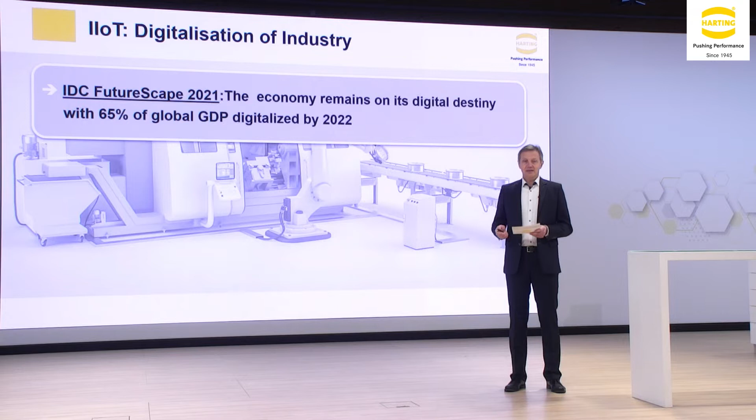You see here 2021 - it was my mistake, sorry, it is 2022. That means this year, we will get globally, worldwide, a GDP of approximately 65% done by digitalized products. At the same time, especially for production systems, a lot of OEMs or operators for production systems are a little bit confused with sentences like, from T-Systems, 'digitalization is disrupting existing business models and global markets became increasingly volatile.' What does it mean?

Is digitalization a risk? Or are the changes - what you, our customers, what we as HARTING can have in the future - are the chances higher than the potential in general?

I hope you agree with me, the German Association of the Industry is saying the Internet of Things and Services is now becoming an integral part of manufacturing. Industry 4.0 paves the way for the personalized product, new services, and a more flexible working environment. This is a global view, a top-down view.

If we look deeper into the situation, I was looking for one example where we can take a look at the problem that OEMs, machinery builders, end users, or operators are facing. What is the problem there?

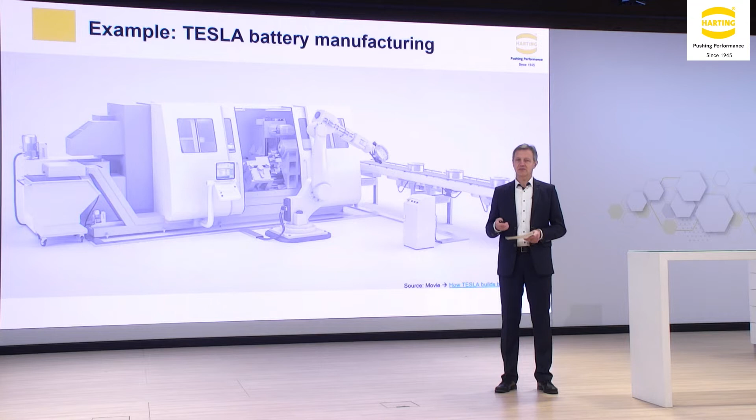It was really interesting that Mr. Elon Musk, everybody knows him as the CEO and owner of Tesla, explained the situation for battery manufacturing, especially in connection with the new contract with Panasonic. Elon Musk talked about the first battery manufacturing plant in the US.

First, we realized that the true problem, where the greatest potential lies, is building the machine that makes the machine. In other words, building the factory.

And remember, please remember, you can read it - they achieved approximately 10 times higher effectiveness with only 10 to 15% of the effort that was needed in the past for this manufacturing plant. You can imagine how big this step was for Tesla.

But at the end of the day, the same Mr. Elon Musk said, we did go too far on the automation front and automated, digitalized some pretty silly things. So how can we balance this? How can we find the balance?

This is the matter we are speaking about today, because we as HARTING are absolutely sure and can guarantee that we can find the right solution for you on the physical layer. First of all, HARTING is known for years, more than 70 years, as a manufacturer of connectorized solutions.

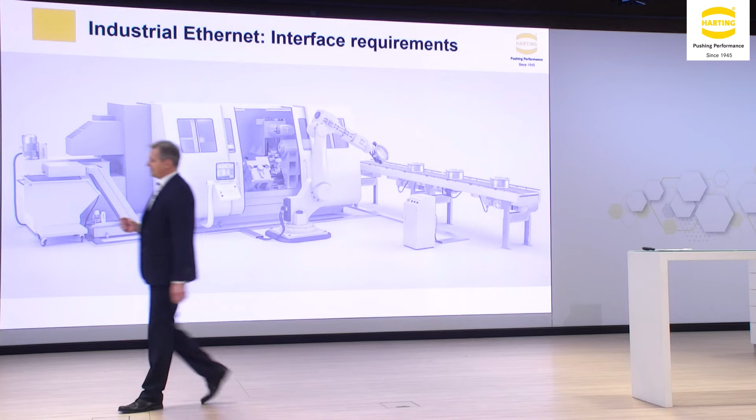The second reason - I would like to show you the machine, because we have our own machinery builder, HARTING Applied Technologies. This is a fully modularized machine. You can imagine we can manufacture assembling machines with up to 7 to 8 different modules, with upstream and downstream modules.

As you can imagine, our HARTING interfaces are used everywhere in these machines, because today we are speaking about Ethernet interfaces, especially data interfaces. We have an HMI where you see a special interface for service needs and similar issues.

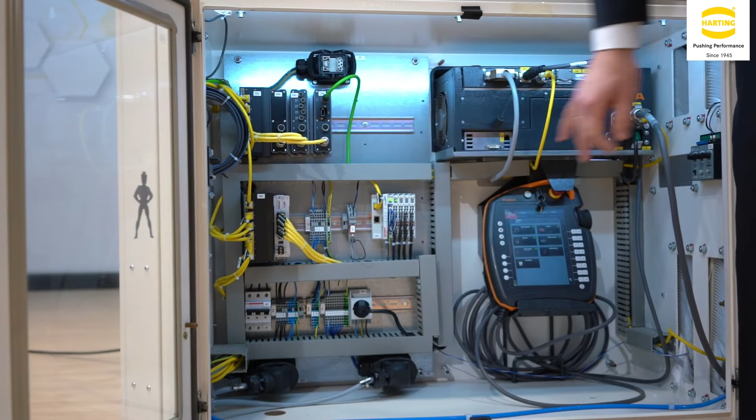Then we have some units, of course from different manufacturers, like a KUKA robot with data interfaces. If we take a look into the control cabinet, you see a lot of connections between KUKA control units, different units for control systems, our own HARTING Ethernet switches with ix - really, really small parts - Ethernet switches with RJ45, and so on.

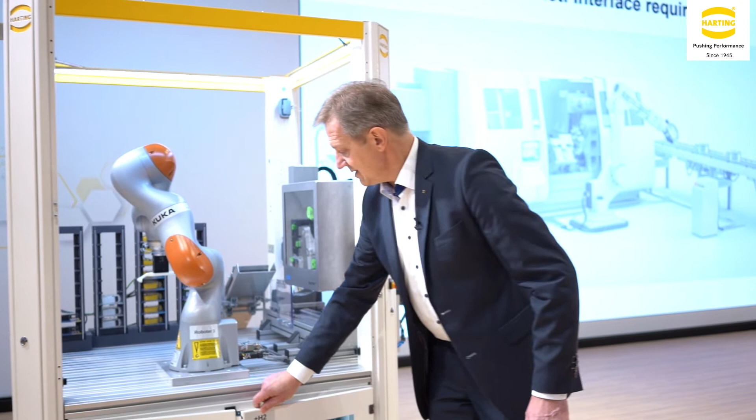Everything you see here on the physical layer are HARTING products. If you go further, you will see later how important it is that we have all different types of connectors, but we also allow you to migrate your network systems in the way that is comfortable for you.

For example, a printing unit connected by Ethernet in IP20, or sensor boxes in IP65.

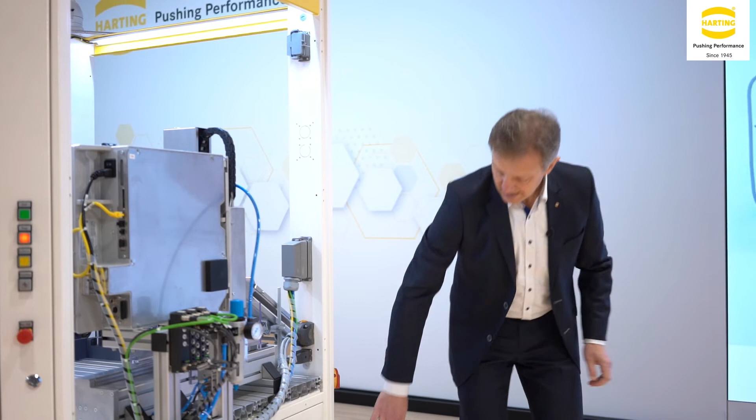I will open this, RJ45 connections for units, connected units there. And additionally, some connectorized possibilities as hybrid connections for upstream and downstream modules. So this is the second reason why we as HARTING are able to provide you the right solution.

Now I would like to go through the general idea of what it means. As already mentioned, we know that we are going from the sensor level network via the standardized field buses - and this is only a picture for known field buses - then we are going to industrial Ethernet, where we are today, and this is the situation where we are migrating with you together, like you saw yesterday and the day before yesterday, to the single pair Ethernet.

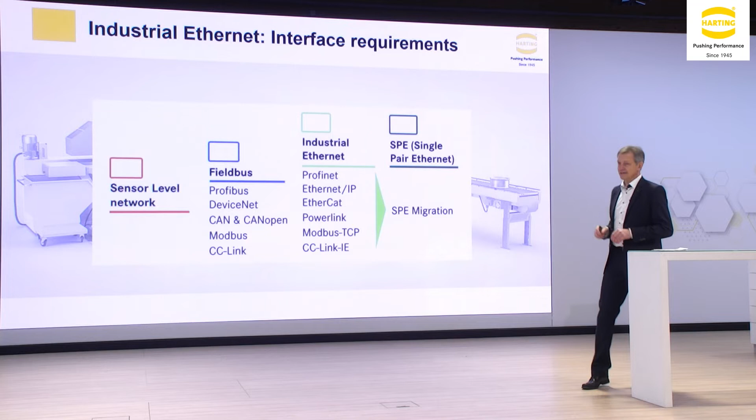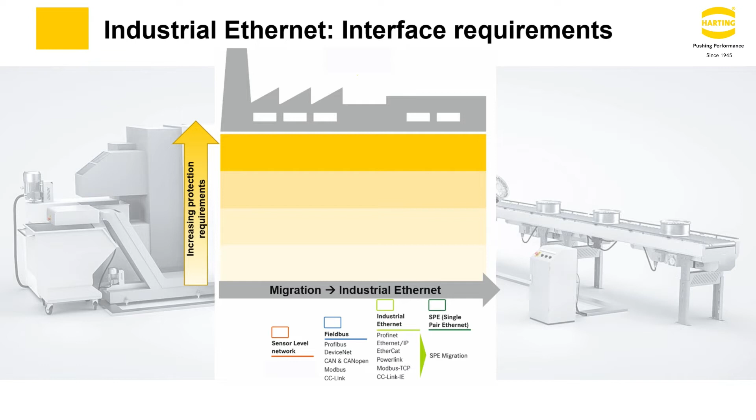Our approach is that you as a customer, on your path of migration, have to be totally free when choosing your connectorized data interfaces. You see this building representing an industrial production system for global building. The idea is that on all levels of protection requirements that you need, we can guarantee that we have the right solution, and you will never have any problems finding it.

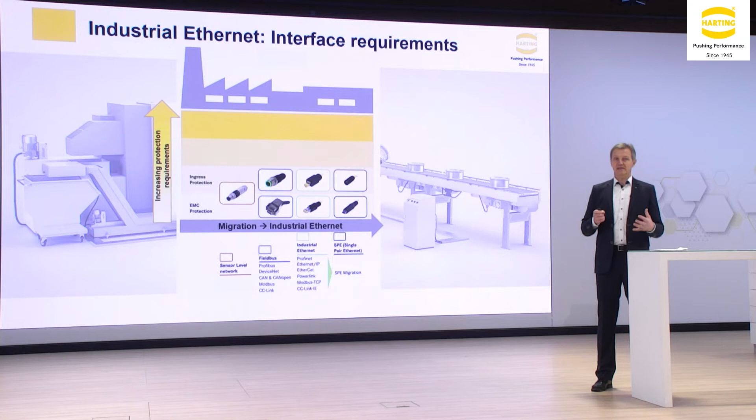This is only a short picture of how it can be done on different levels. You see the lowest level is the level with only IP20 protection. The second level is IP protection at different degrees. The third level is the situation if you need special vibration or mechanical environment solutions. And the highest, additional level, we also have interfaces for hygienic zones.

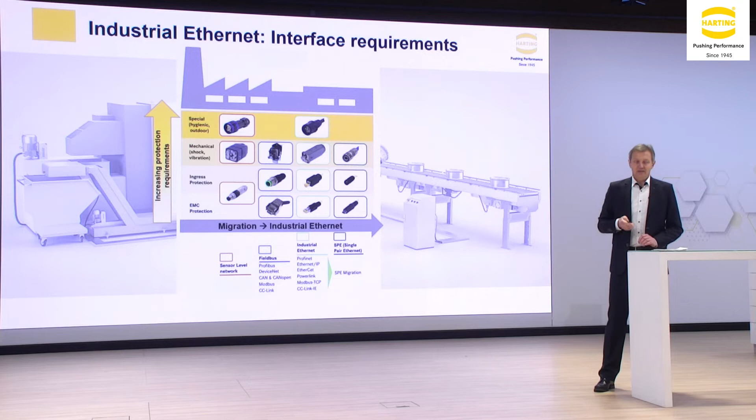Additionally, what you need - and we know this - you need different products independent of your production processes. For example, here you see the typical representative of Ethernet connectors, which is RJ45. We have one product called the multifunction RJ45, and the second one is a preLink. These are totally different products.

Why? The first one is possible to connect absolutely toolless, and the second one is a product where you have really, really high level of quality, but for this type you need some tools.

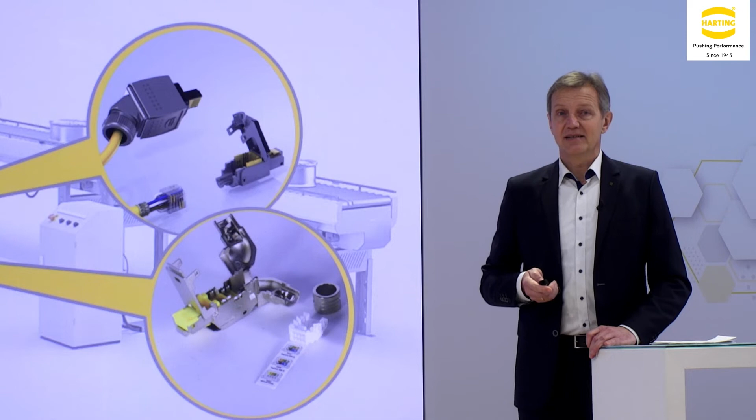And the second issue why we say that you have freedom to choose the right connection is that you can combine everything with everything and protect it in the right way. One example of this is the so-called Han-Brid. You see also RJ45 in a small connector, and our Han-Modular system where you can combine different modules together.

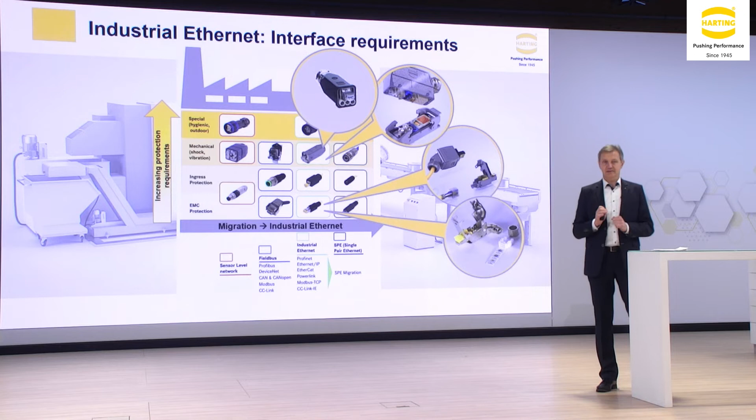Of course, we know that the situation today is that industrial Ethernet is going further more and more, and we see the situation, approximately since 5 years, that the share of industrial Ethernet nodes is really higher than the share of old-styled, let me say, field buses. The picture you see here on your screen shows this again.

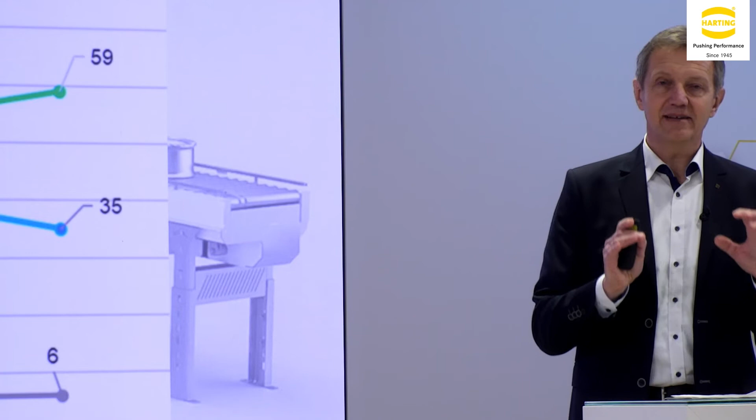What I would like to do with you now is to change and ask: is it really so that you as a customer, as an OEM, or as an end user operator of your system, are totally free and totally independent from the environmental issues? I would like to show you some products that we have.

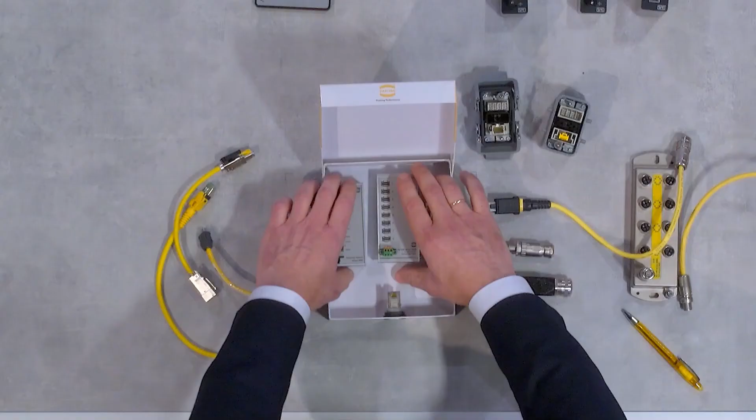This is my small cabinet, and you see that this cabinet we have equipped with different types of our own Ethernet switches and similar devices. Already here you see the path of migration. For example, you see here our 5-port Ethernet switch with RJ45, 5-port fast Ethernet, 100 megabit being the highest speed, 100 megabit per second. But I would recommend the so-called ix connector, where you are still in the range of 8-pair connectivity, but working here with a gigabit connector.

So now I would like to demonstrate how we can go with you together from the IP20 of my small control cabinet, how you can go to the next level in the IP65 environment, or go further on the fabrication level, and so on, up to and further to the cloud.

The idea is that every time you have the situation that you can change from the IP20 environmental systems to IP65, IP67 degree environments.

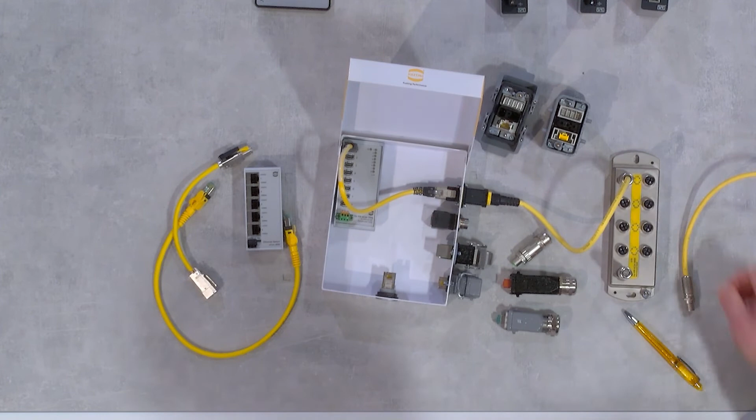You see, I have just to put it on. So that's there. And I can go further with the next connector with different types. In this type, it is a screw connector and so on. You see that the idea is to be absolutely free in your choosing.

As the next example, you see the panel feed through for RJ45, where you can combine RJ45 and Ethernet connections with power connectors, with power contacts. You can combine it with connectors like, in that case, Han 3 A for outdoor applications, and so on. And last but not least, you saw it yesterday, but I would like to repeat it today. You can go in your migration way and go further with converters from RJ45, or from today's standard Ethernet, to single pair Ethernet.

And this is the reason why you can create your own new equipment based on all our experience, but you have the possibility today and you are free today for everything you need. This is the idea behind this.

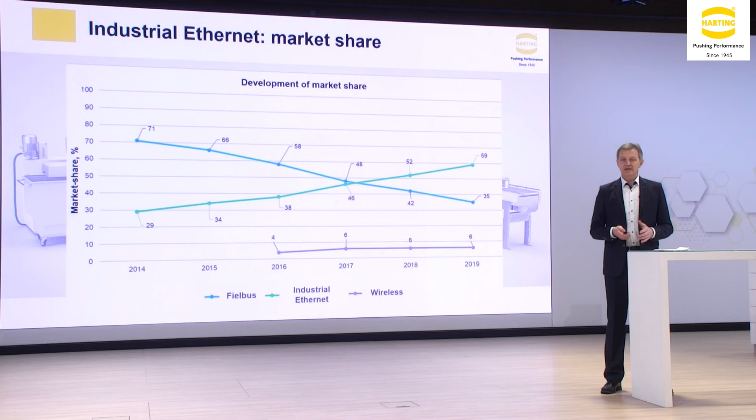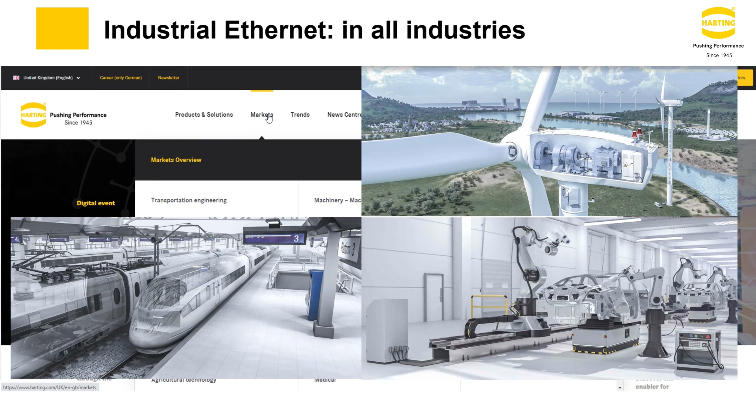But finding our recommendations is absolutely easy. You have to go to our website. If you go to our website, you can see on the headline markets. By clicking on markets - it's not really live, it's part of my presentation - by clicking on this you get different markets like railway, robotic, assembling, wind energy, or production systems, machinery. And then the next slide shows the example of robotic.

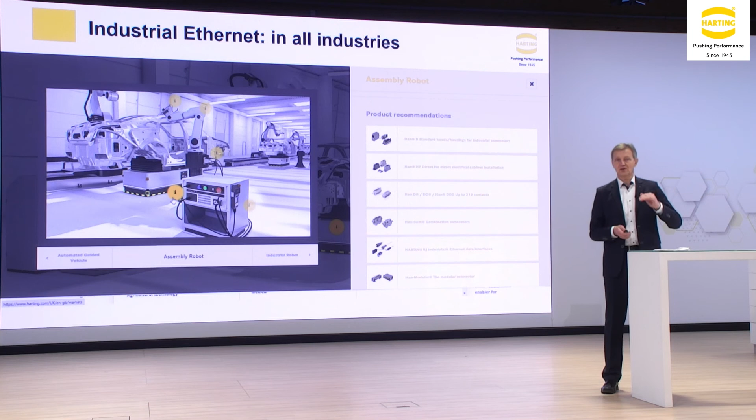For example, you click on the part of assembly robots, and by clicking on that you get our recommendations, different recommendations for different products, of course, but also recommendations for example for data connectivity. And by clicking here or there, you get a lot of products, and you can see that this product finder can help you find only RJ45 products.

We are working every day on this as industry segment manager to make it in the proper way and make this recommendation as full as possible. I hope this overview shows in a short way how easy it is, from one side, to find the right optimized solution.

And believe me, the problem is not finding the connectorized solution for your specific problem. The biggest issue is how you, our customer, can handle your data in a way that lets you create new values for your customers, for your operators, and so on.

But my message to you is, please, let us work together. If you are an OEM, equipment manufacturer, build on your core competences and take targeted measures to expand existing functionalities. If you are an end user, you are very familiar with the problems of the equipment you are using. But at the end of the day, we are on the way to create new values for everybody, new values on the way to Industry 4.0. And this is my main message, or our main message, today.

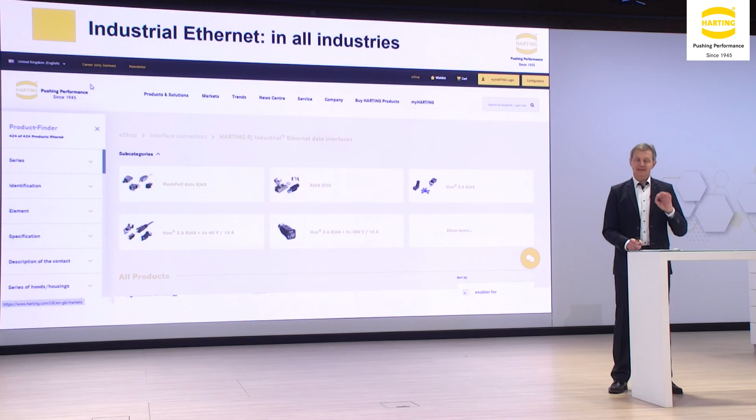And in the future, please give us, HARTING, a chance. Contact your HARTING, our HARTING colleagues in your local subsidiary, in your country. Ask us, HARTING colleagues, about your problems. I can guarantee you that we will find exactly the optimized solution for you in any way.